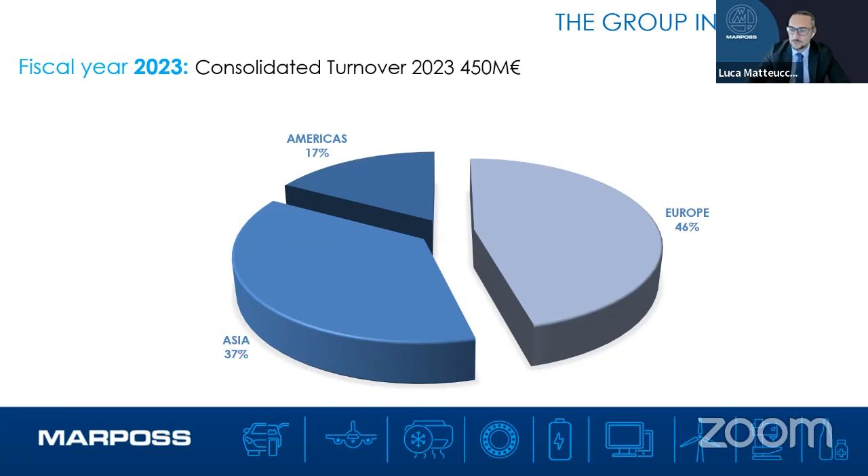2023 has been quite a good year, even if it's still affected by COVID, yes we can say this. The majority, almost 50%, is coming from Europe, and the remaining is coming between Asia and Americas. We have good hope for America due to this new and recent Trump election.

So let's hope to show you different numbers coming from Americas next year. Where we are based: our main sales and service centers are in Germany, China, USA, Japan, and Italy, while our main manufacturing plants are in Italy, China, Germany, US, and France. As some of you may know, we are moving forward to establish a small manufacturing facility also here in India, due to the fact that India is becoming more and more relevant in the international manufacturing landscape. So we really need to move forward with this decision soon.

Which are the markets we are into? Apart from our stronghold coming from machine tool makers and gauge and fixture market, we are pushing forward, and today we have some representatives of this additional market, moving away a bit from the standard automotive industry. We have aerospace, and here in India it's become a very interesting market, as we saw in the last panel discussion. Biomedical, glass industry, where we saw there is quite a good market share in Europe, and we expect the same will become true in India.

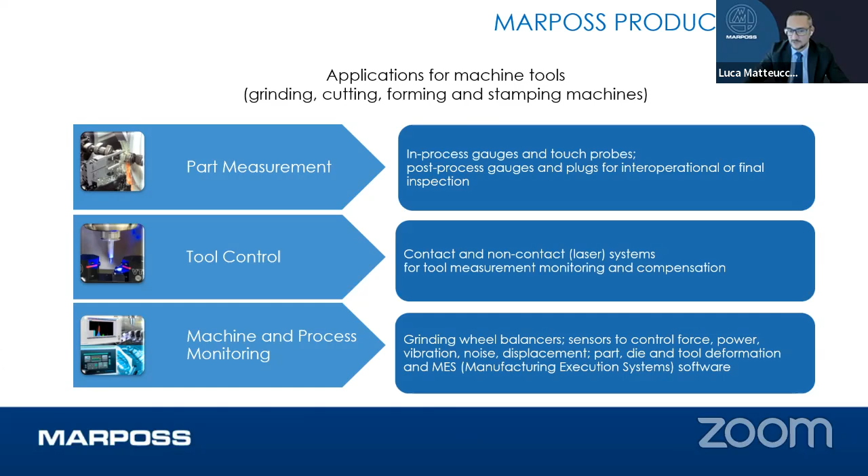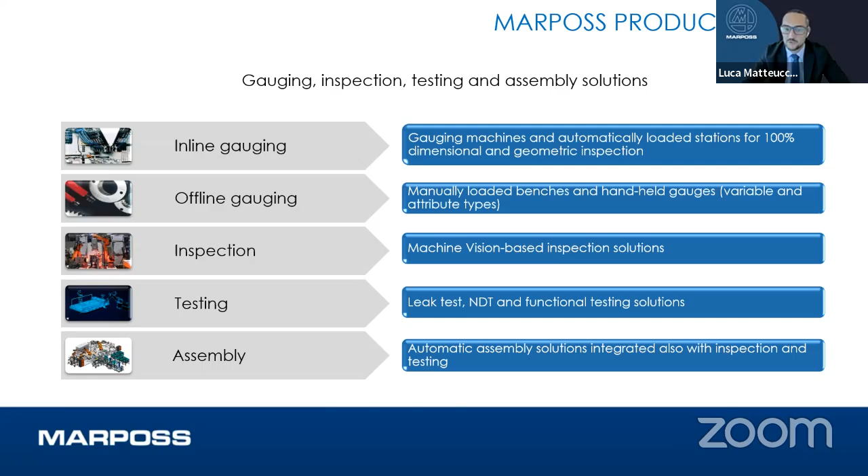Then, obviously, when we analyze the part related to inside the machine, we also offer the post-process, or the after-machining process checks, where we could have inline gauging, offline gauging for sample testing, inspection, testing with non-destructive test, leak test, and functional testing of, for example, batteries and motors. And we also reach the point where we are able to provide completely automatic assembly solutions integrated inside the line of our customer.

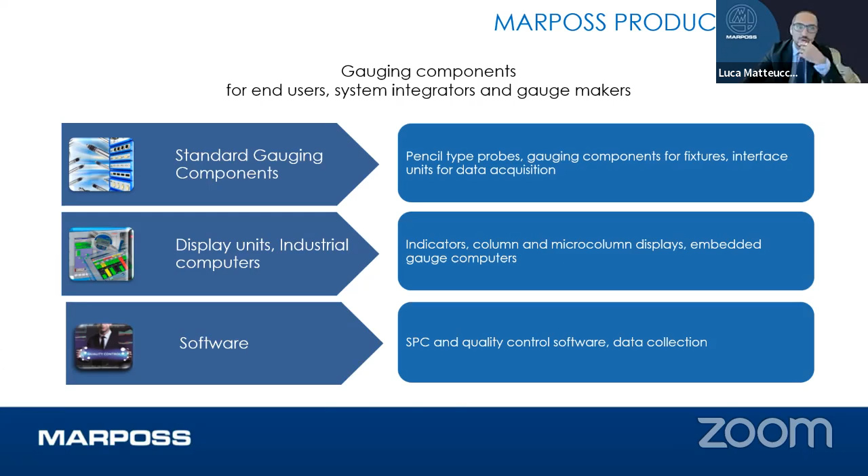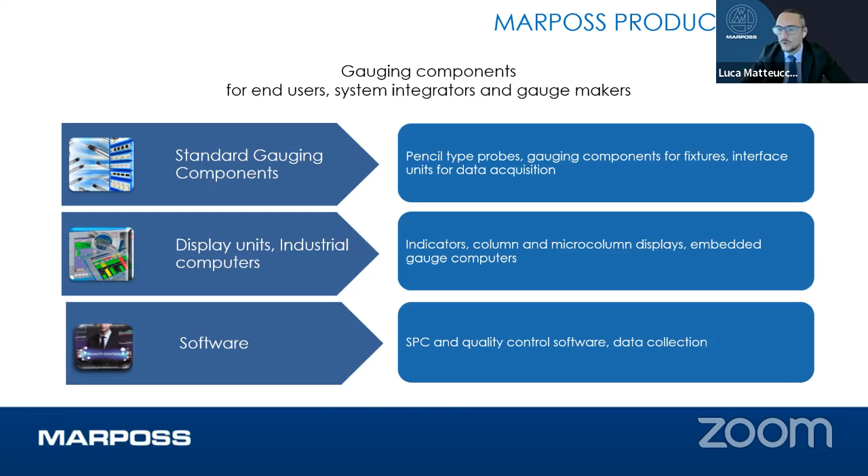How are we able to do this? We are able to do this thanks to our own technology based on our gauging probes, our software, along with our industrial computer, and the software that is collecting all this information to give you the quality indication about how your process is going and what you have to do in order to correct it and maintain the correct level.

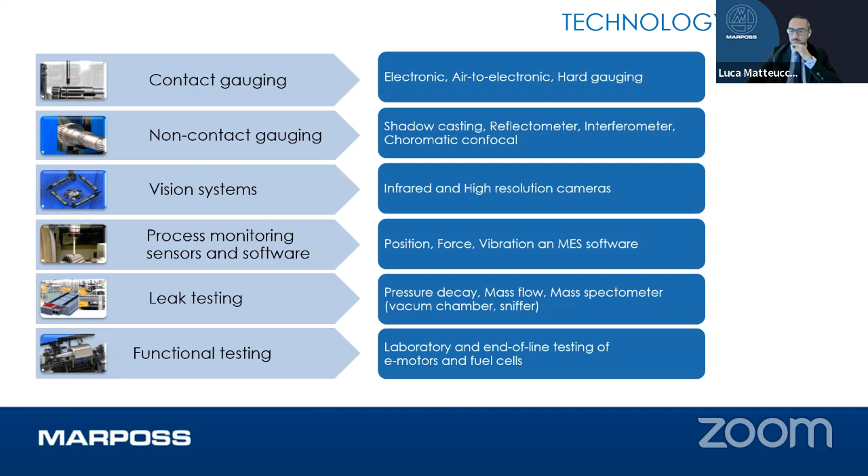So in terms of avoiding overproduction and having an application that's able to measure various parts, we also move forward with this kind of technology. Vision system, if you want to say, is more or less related to the above one, but in a different way. As we said before, process monitoring, sensor and software, again to check the entire environment for the machine, the leak testing and functionality test.

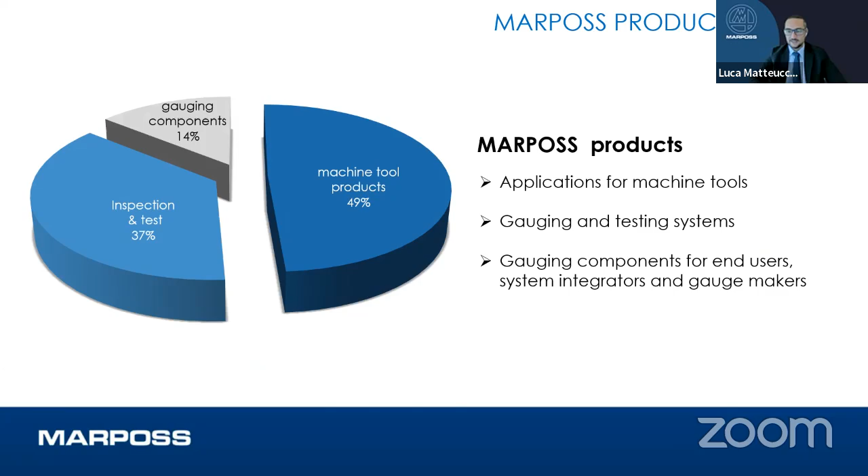Having said that, what at the moment is our range? Our range is coming from, as you can see from this slide, around 50% machine tool products, meaning all the ecosystem related to the machining of the part. Following that, the other big chunk is inspection and testing, around 37%, and the remaining part is the gauging component we just saw in the previous slide.

So we are trying to be as sustainable as possible, especially in this recent time where everybody knows how climate change is affecting our planet.

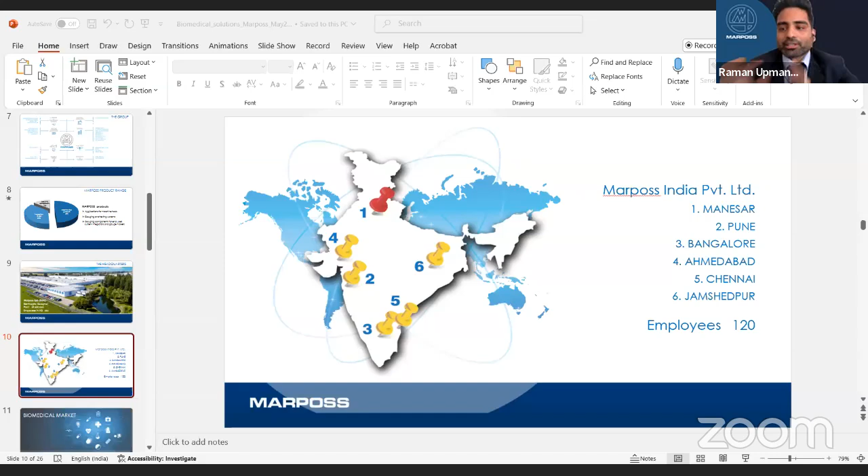So as Luca said, Marposs is a family, and most of the people here have been associated with Marposs for so long. For me, it's currently 3 years with Marposs, and in that time I've felt like I haven't been working in this company for just a short while - that's the family culture Marposs gives. Luca was correctly right about the family culture, and I'll take it a little forward from what Luca has explained to you about Marposs globally.

Just one slide from my side for India also. As Luca explained, we have offices all over India, with the head office in Manesar, and offices in Pune, Bangalore, Ahmedabad, Chennai, Jamshedpur. Total employees is 120. The point is, we've opened offices all over the country because Marposs has a tendency to stay very close to the customers. Manesar covers the north region, and we have a manufacturing facility there in India.

Pune is also a manufacturing hub, along with Bangalore, Ahmedabad, and Chennai. Just to cater to customers of different ranges with the least possible time to provide after-sales service and even sales support, we have opened offices all over the country.

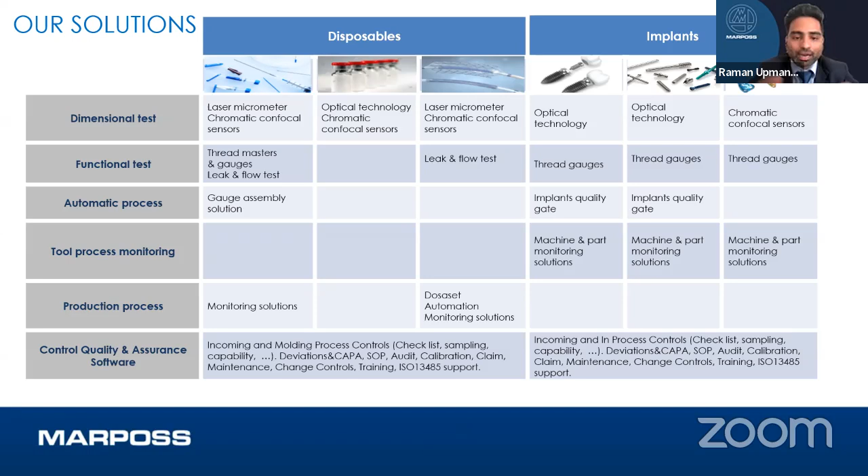For the production process also, we can provide automatic dispensing solutions, which can automatically dispense, say, cyclohexanone to bond something. Apart from that, we also have Industry 4.0 software to link all these.

I'll move on to the implants now. For implants, the first solution we have is the optical solution - the OptoFlash XS. It does complete measurement of orthopedic screws and dental implants.

It can measure threads, pitch diameter, size, profile angle, thread total length, linearity, and concentricity. It recreates the 3D of the complete system, based on the shadow casting process. Then you can have any measurement through our software and cameras, which use the shadow casting process.

Next is the confocal sensors, which are used to detect manufacturing defects. Confocal sensors are based on confocal technology, that is white light technology. Once white light is emitted from our sensor and reflected or refracted back from the surface, with the wavelength calculation we can determine structural and manufacturing defects of the implants.

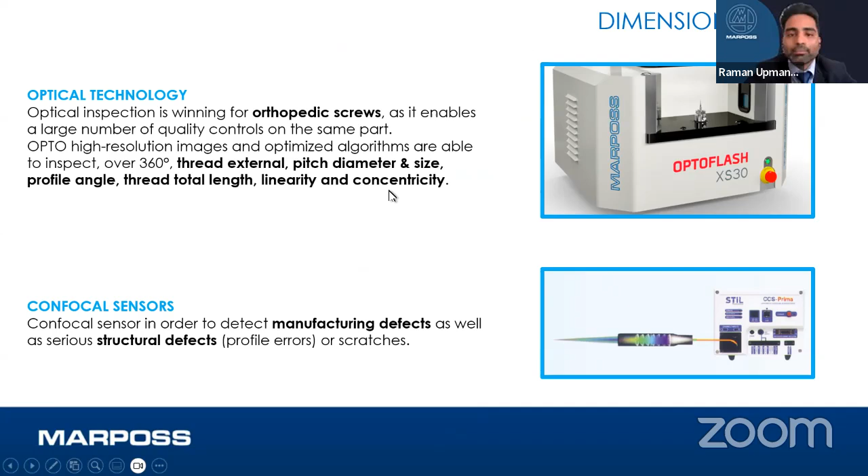Third is functional and inspectional testing of internal and external threads in orthopedic screws - these are gauges we provide to check the mean diameter, angle of the threads, and pitch errors. These gauges are not just normal gauges - people might say they can manufacture gauges themselves.

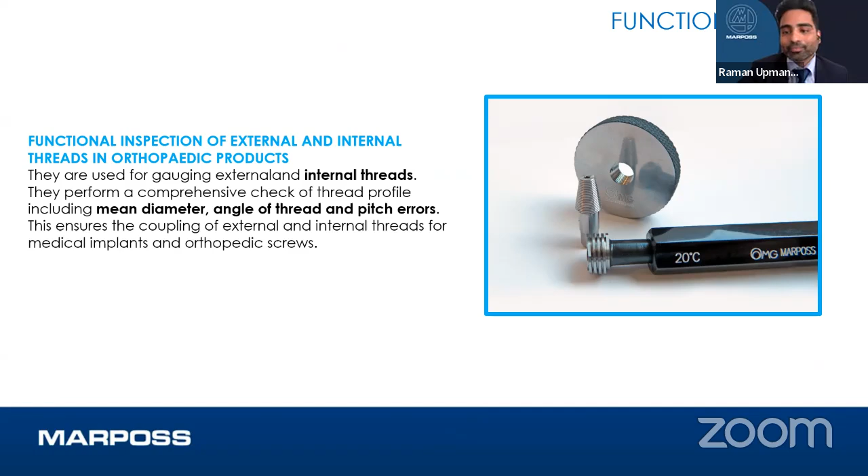Marposs provides gauges with ISO certification, which is a must in the medical segment, because if you're checking a dimension, it will ultimately go inside the human body. So 0.1, 0.2 dimension variance here and there can make a lot of impact. We provide these gauges to check dimensions and provide go/no-go gauges that are ISO certified.

Next, we also provide implant quality gates, as I explained in my previous slides - Marposs can provide dimensional measurement of screws. Apart from that, we can also provide functional testing of screws and nails for implantology.

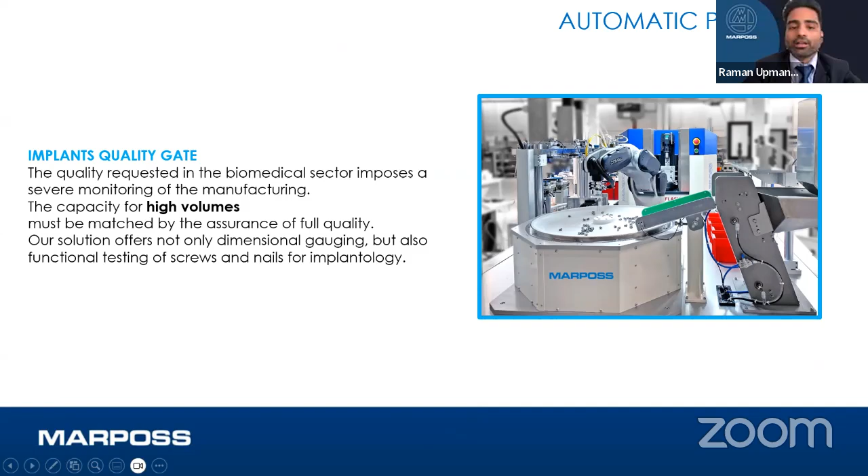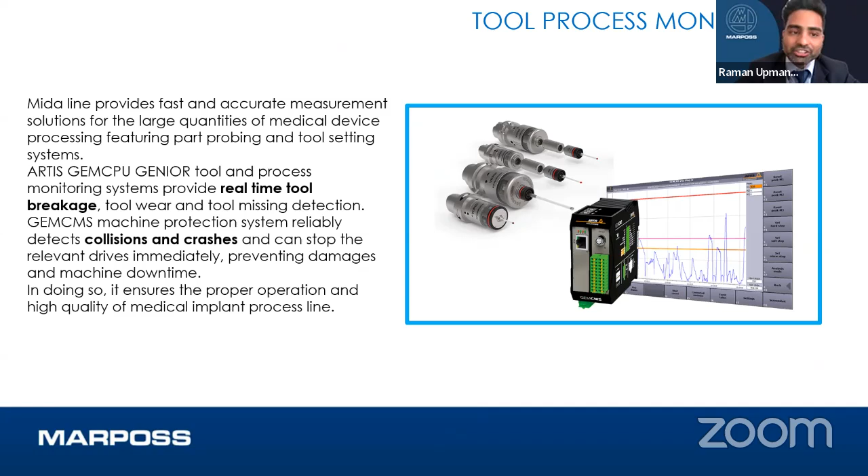This is for tool process monitoring, which I mentioned - whenever we're making screws through machining operations, we can put sensors inside the machine to check the continuous health of the tool, providing real-time tool breakage, tool wear, and tool missing detection.

Next is the latest solution Marposs introduced, the 3D profilometer. These are based on confocal point sensors, but can reconstruct the 3D image of dental implants, and you can check measurements like surface topography through this.

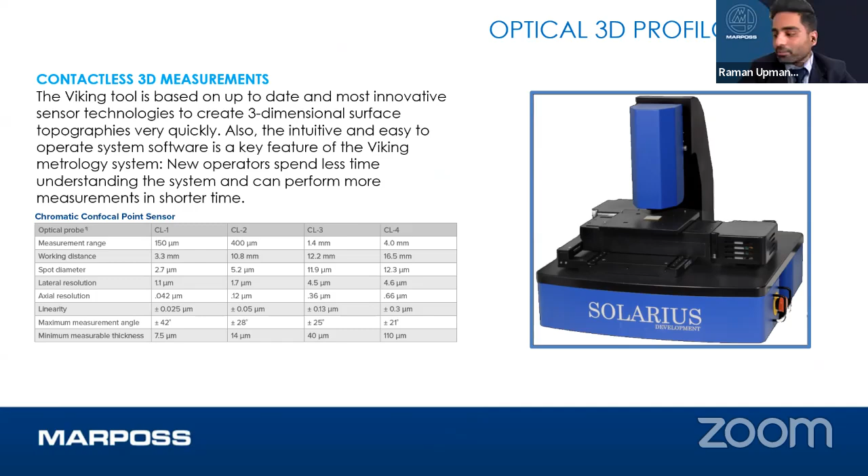Next, I'll move to the disposables. So the first sensor solution for disposables is again the chromatic confocal sensor, which is used to check the thickness of any of the tubes or the glass products.

Next one is the optical technology. As Luca explained, we are into the glass segment also. So for the glass segment, if you want to check vials - in the medical segment, vials are manufactured through glass - if you want the measurement of vials, like the neck diameter, the pitch of the neck, or the length, point to point distances, anything you want to measure dimensionally, we can provide through our optical technology.

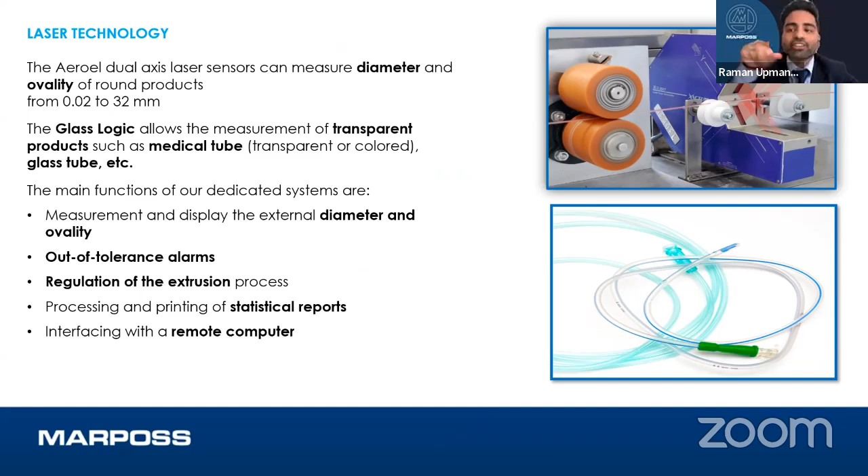Next one, if you might have seen blood tubings - blood tubings are produced by the extrusion process - we can provide you the diameter gauge that is totally contactless, through which you can continuously measure the diameter and ovality of the parts once they are extruded from the machine. Apart from real-time measurement of the diameter, we can provide out of tolerance alarms and regulation for the extrusion process. We can provide feedback to the PLC to correct if the diameter is going out of spec.

The second solution is again the laser-based solution, but that is a portable solution - what we call a handy wire scanner. So if someone wants to check the diameter offline or inline of any medical tube, they can use this laser technology to check.

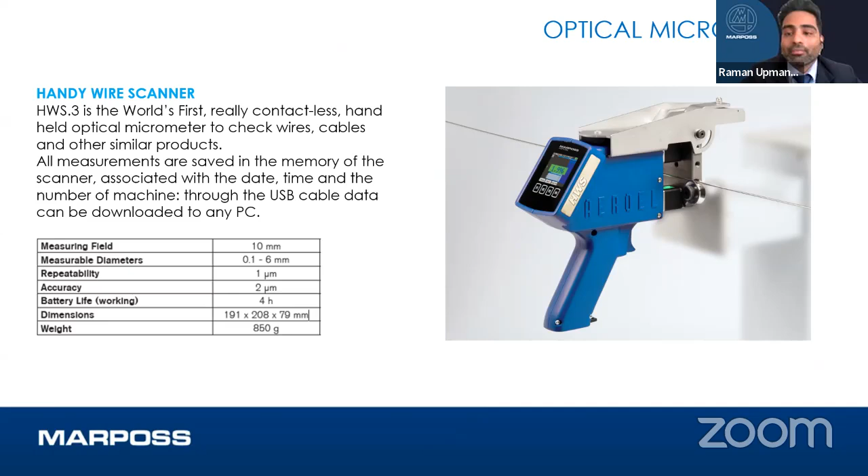I would like to draw the attention of all viewers that, as I told you, Marposs is very well known for precision. We provide repeatability up to 1 micron, which is highly precise for non-contact gauging.

Next, as I explained for the implants also, we can provide ISO certified gauges to check the thread connectors, as per ISO standards - ISO 80369 and ISO 13485. These are all already ISO certified gauges.

The final solution I would like to introduce is leak testing. In the medical segment, leak test is very important. Suppose you are manufacturing blood tubes, blood bags, urine bags, anything - if you do not do the leak testing, you cannot pass your product and send it to the market.

Marposs can provide you the complete leakage testing solution, for air leakage testing. Apart from the leakage, we can also provide flow test with a single system only - so you can have flow testing to measure flow and leakage in one go.

Next one is the solvent dispenser. When blood tubes are manufactured and then joined to a connector - that is a plastic connector - the fluid used to join that connector is called cyclohexanone. So this is the production equipment we can supply to have the automatic bonding of the tubes to the plastic connectors.

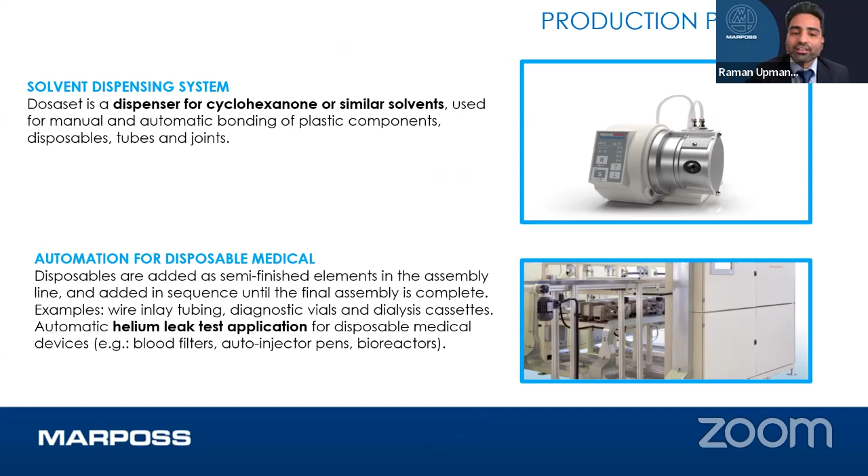Apart from that, if someone wants very precise leakage detection which cannot be detected through air - because air has the limitation to detect leakage up to 10 to the power minus 3 millibar liter per second - we can also provide the helium leak test application, which can be used in blood filters, auto injector pens, and bioreactors.

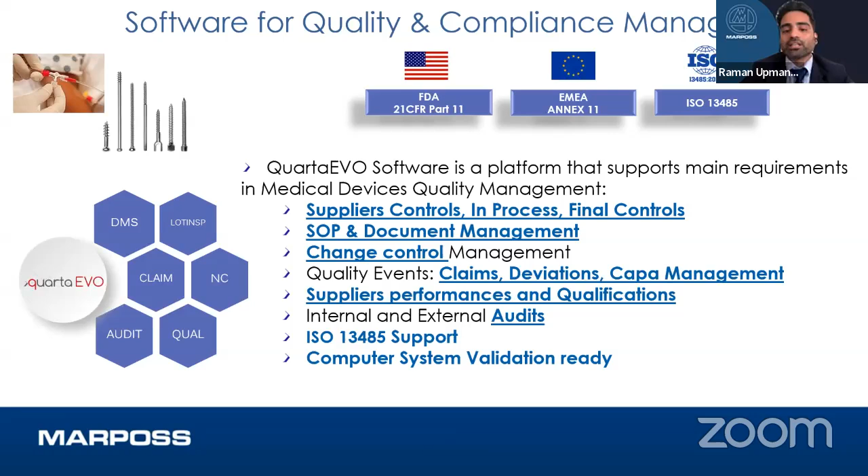Apart from that, as I explained, we can provide software for quality and compliance management - Industry 4.0 software, which can be supported by ISO standards like 13485. So that will be all from my side.

Thank you so much. Thank you, Raman, for taking us through your slides. And I feel healthcare, medical systems, biomedical is very important. And like you said, one life lost is far too many. I guess manufacturers of the biomedical industry would look at all those products, and if anybody wants to improve quality, leak testing and other stuff, they must look at this product. Thanks, Raman. And now let's move to Hanish.

Thank you, Dineshji. Thank you, Luca, for this opportunity. I will speak about our offerings in the semiconductor industry. As an introduction, I started in Marposs in 2004, coming from college as a service engineer, and then I moved to sales. Then I served as regional head for North, moving to strategic business, and now I am currently key accounts manager head as well as industry manager for semiconductor and 3C. So I'll focus on the semiconductor offerings today.

So, what does Marposs offer? Marposs provides sensors for process control during and after the machining process. I'll just skip through this slide - Luca has already covered it - so what we do, the sectors we are into, the numbers for the group.

So, machines for chip manufacturing. Here we are trying to show the key machining process and the equipment in chip manufacturing, starting from ingot grinding to packaging and die attach.

What does Marposs do? Marposs sensors can be integrated inside an automatic machine to keep under control some parameters that are essential to keep the production quality under control and reach a constant productivity. So the keywords here are production quality and constant productivity. I will speak about our solutions, which are offered inside the machine for three processes.

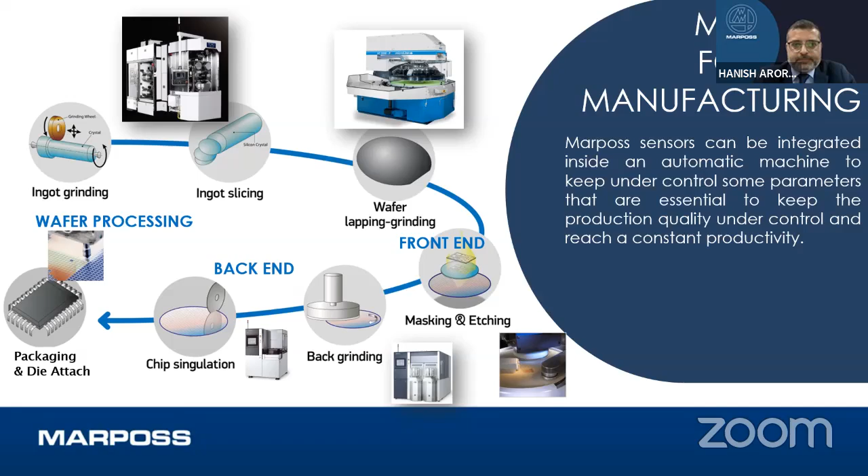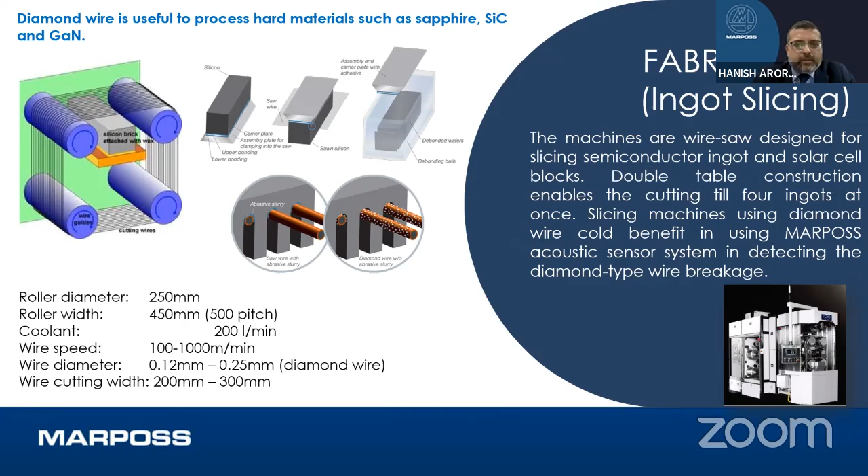For solar, there are square ingots. For semiconductor, there are round ingots. The slicing machine using diamond wire could benefit from an acoustic sensor system in detecting wire breakage. The wire is around 200 micron in diameter. The diamond may chip off and the wire may break, so we are basically offering an acoustic sensor with a P1D AE amplifier, which is able to detect the wire breakage.

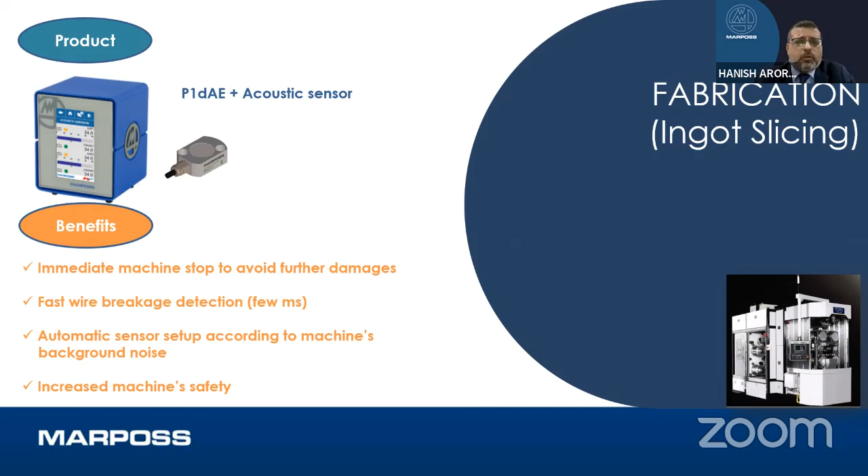So we have a P1dAE plus acoustic sensor. The benefits are immediate machine stop to avoid further damages, fast wire breakage detection in just a few milliseconds, automatic sensor setup according to machine background noise, and increased machine safety. So this solution goes on the ingot to detect the wire breakage.

Coming to back grinding, achieving the correct wafer thickness before assembly is critical in semiconductor manufacturing. Wafer back grinding is a semiconductor manufacturing process designed to control wafer thickness, which is essential to produce ultra-thin wafers used to create stacked and high-density packaging. As we understand, the wafer has to be thin because the chips are already there, so an 800 micron wafer has to be thinned down to 100 or 150 micron, depending on the application.

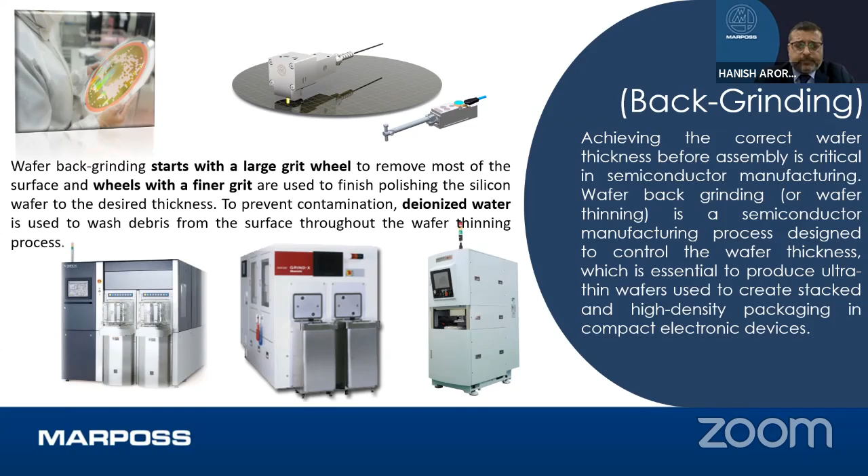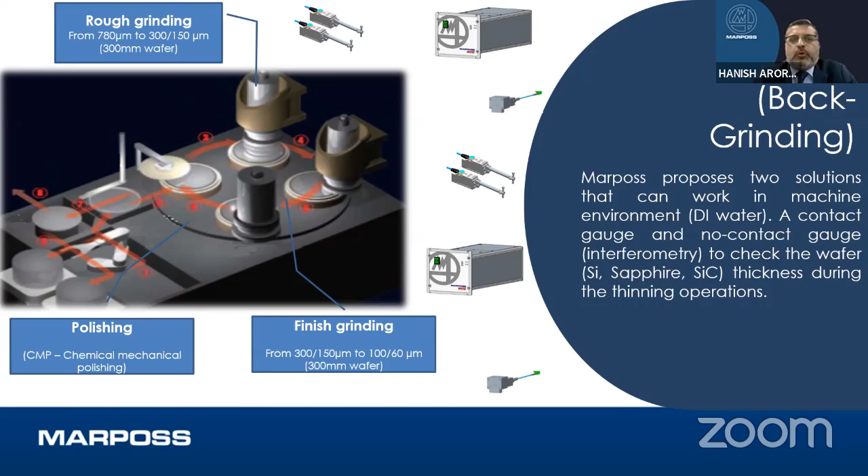There is a huge grinding wheel, and DI water or ultra pure water is used as a coolant. What is our offering? Marposs proposes two solutions that can work in the machine environment. We can offer a contact gauge or a non-contact gauge, depending on the application and depending on the material during the grinding process, basically checking the thickness during the grinding process.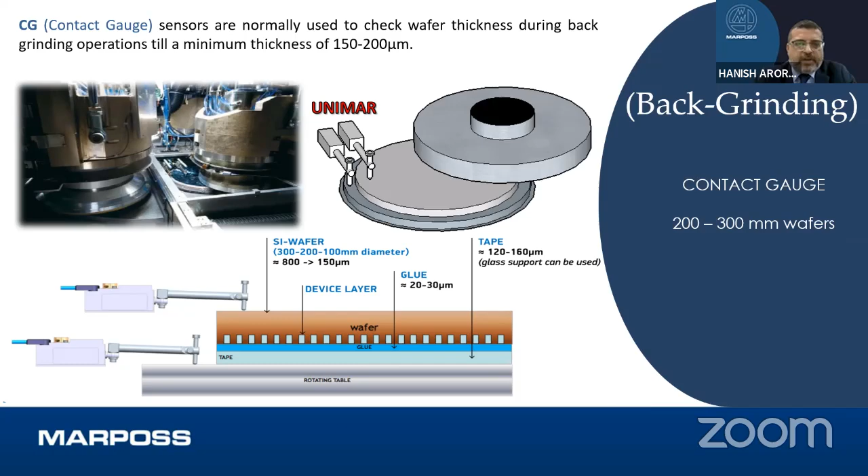The first offering is a contact gauge, normally used to check wafer thickness during back grinding operation down to a minimum thickness of 150 to 200 micron. In case of silicon material, we can use a contact gauge. But there are wafers that cannot be measured with contact or infrared, such as hard materials like highly doped wafers, gallium nitride, silicon carbide in some cases, and gallium arsenide. So we have a different solution for that.

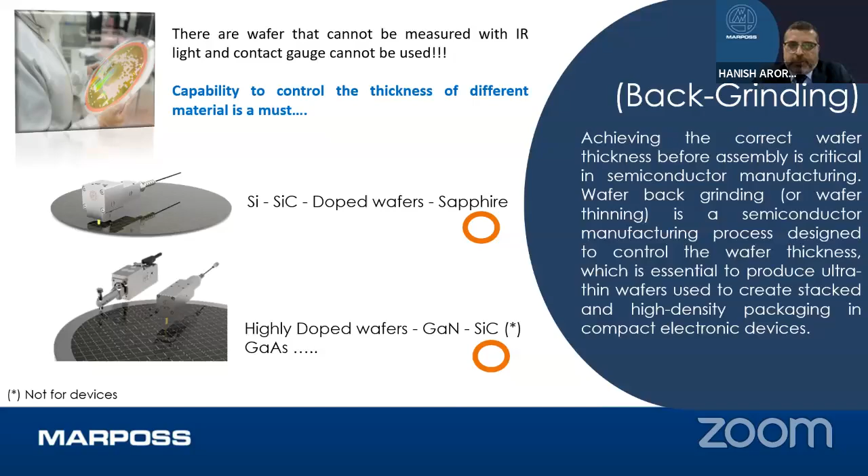We are offering a flexible configuration using multiple types of sensors, with the capability to control the grinding of different types of wafers and produce a stable measure. As we understand, wafer chip manufacturing is a complex process using different types of materials, so we have designed different sensors and amplifiers looking at the industry requirement.

In case of silicon, we have a contact gauge. In case of silicon carbide, which is transparent to infrared, there is interferometry using an IR gauge. Then we have confocal, where we can use it with a distance gauge. Then there is a contact gauge where we use the IR gauge, and different Marposs sensors for the machine monitoring.

Here I would like to emphasize that the Marposs controller acts as a black box. There is a log file which basically checks what parameter has changed if there is any issue, whether on the machine side or the measurement side. So we have a log file which is able to trace where the problem stands.

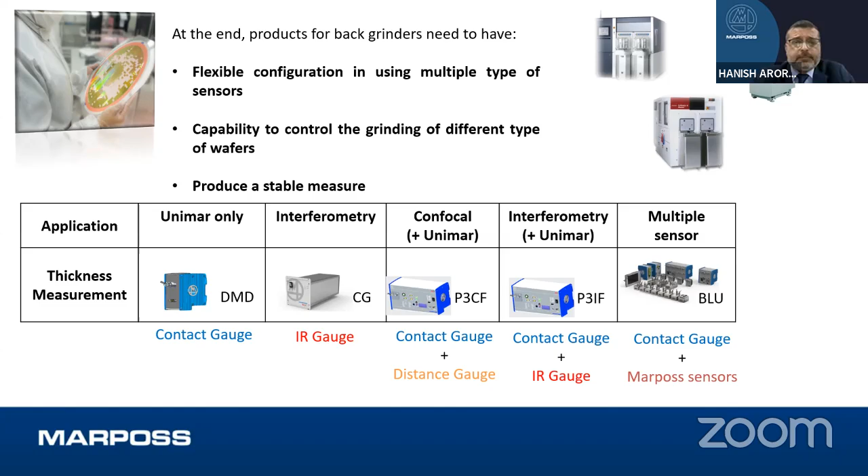Coming to the NCG. A silicon wafer can be thin for less than 150 to 200 micron, where we can use a contact gauge. But where we need a thickness of less than 100 micron, we use an NCG, a non-contact gauge that works on infrared. In case of silicon and silicon carbide, where the material is transparent to infrared, we can use an NCG and control the wafer grinding process, measuring thickness down to around 4 microns.

It comes in different configurations, depending on the material and application. It's a reliable solution in dry and wet environments. The measure is not influenced by any tape, support, or glue presence. Mounted on an arm, it can be used to check wafer's TTV. We can check thickness coming down from 900 micron to 4 micron. Smart elaboration and digital output is

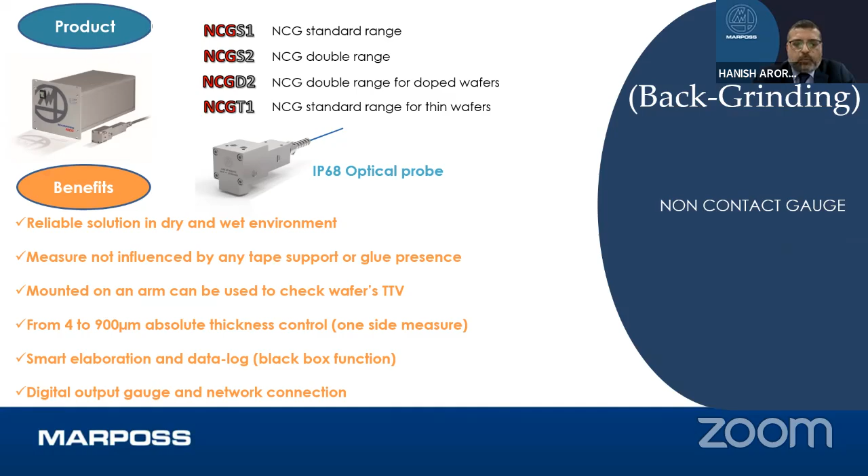there. Very recently, we have developed a new gauge that we call P3CF. This has been developed for hard materials, where we have highly doped wafers, ceramic plates, and germanium, which are not transparent to infrared.

So in that case, we are using confocal technology. There is one contact gauge on the rotating table, and the other confocal gauge is on the wafer, so not destroying the wafer while also measuring the wafer thickness. This is mainly used for hard materials.

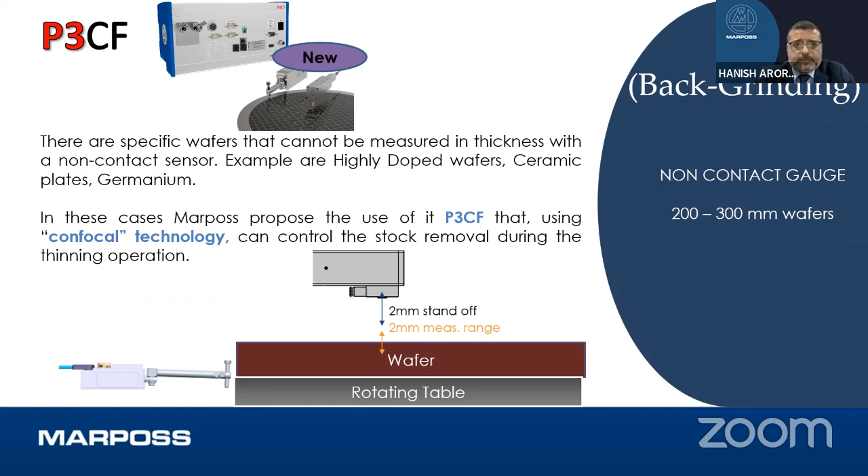Coming to the next process, that is dicing. Initially there was an ingot, then a wafer. The wafer already had chips on it. We had to grind it from 800 micron to 150 micron, depending on the application, where we were doing back grinding. Now there is dicing. Chips are on a thin wafer after back grinding, and now we have to cut the chips, which will later be packaged. A dicing saw is used to basically cut the chips from the wafers, and semiconductor wafers can be of different materials, such as glass, ceramic, crystal, and others.

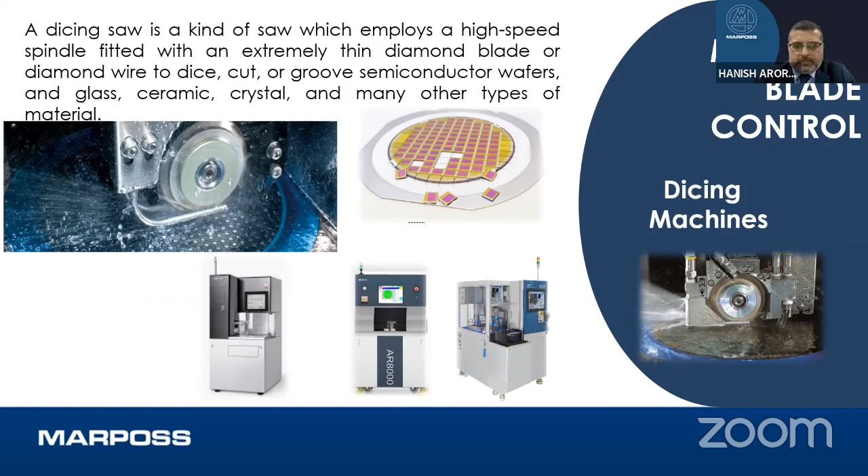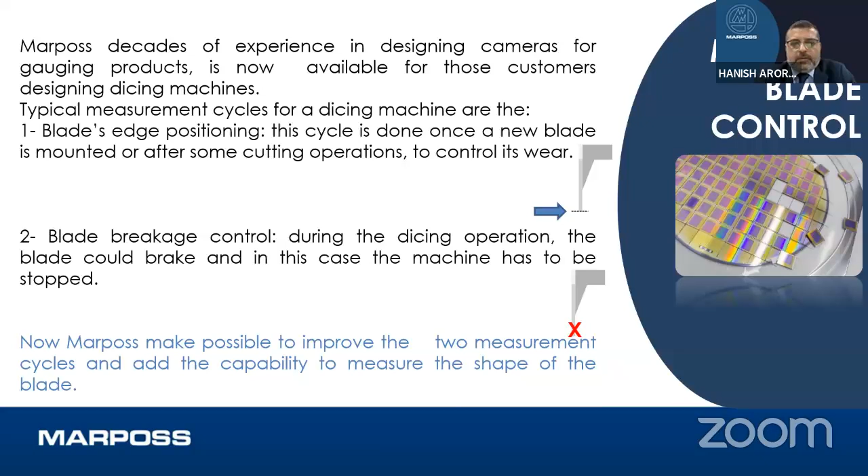Marposs has experience in camera technology and solutions on the machine. We have developed a laser diode which checks the blade's edge positioning. This cycle is done to control the blade's wear. We have another sensor doing the blade breakage control. We use the MDG1 controller, where there are two sensors: one for positioning to control blade wear, and the other for blade breakage.

Actually, the blade is quite fragile, around 30 micron in thickness. So we need some sort of mechanism to understand if there is wear or breakage.

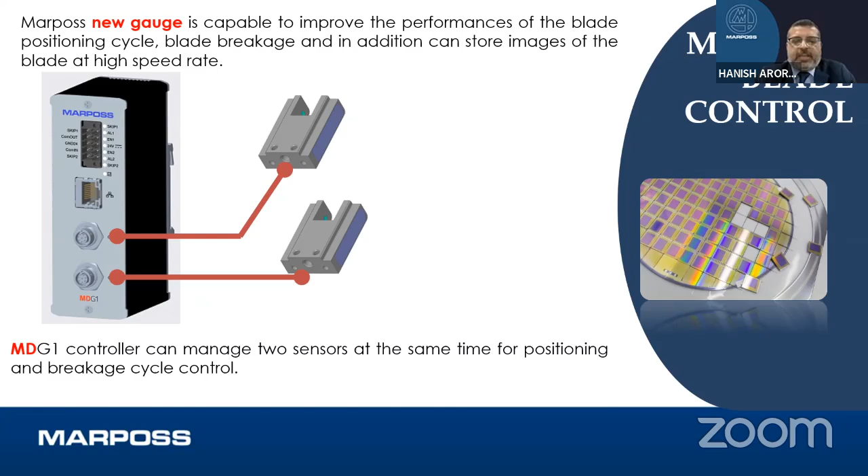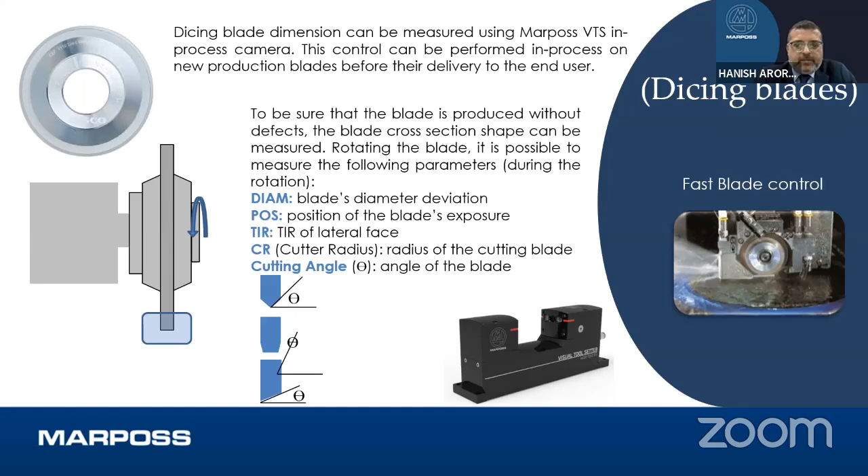Additionally, we have a camera-based system. Dicing blade dimension can be measured using the Marposs VTS in-process camera. There is a visual tool setter that can check the dimensions of the blade. We can check the blade's diameter, its position, the TIR, the cutter radius, and cutting angle. We take a picture of the blade with a camera and are able to measure these parameters.

So this is how it looks like. And if required, we have to change the blade.

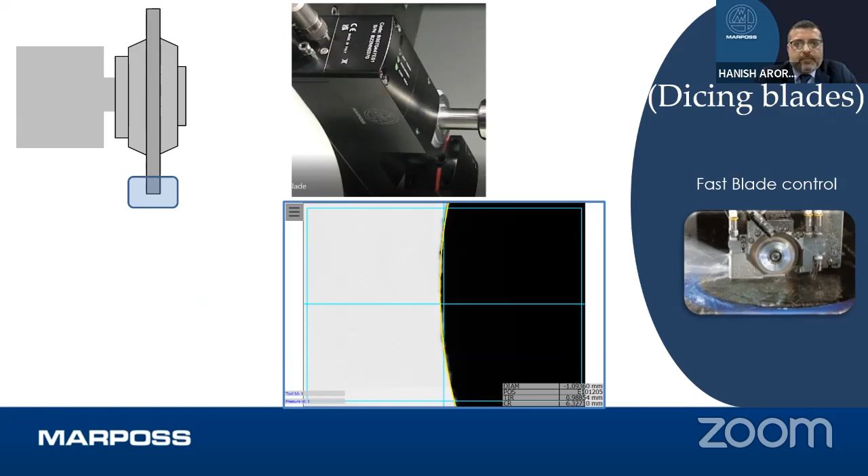I spoke about our sensors used during the machining process. Now comes the second part, the sensors used after the machining process, mainly for metrology and inspection. Marposs can offer a wide range of sensors: it could be a single point contact confocal sensor, a line sensor, a camera, white light interferometry, or an infrared sensor.

Semiconductor manufacturing is a complex process, and we may need metrology at various levels of the process. We offer different sensors for inspection, thickness, TTV, bow, warp, and 3D topography. Point sensors work on IR and white light and are able to detect the thickness of transparent and non-transparent materials, ranging from silicon to gallium arsenide, gallium nitride, sapphire, etc.

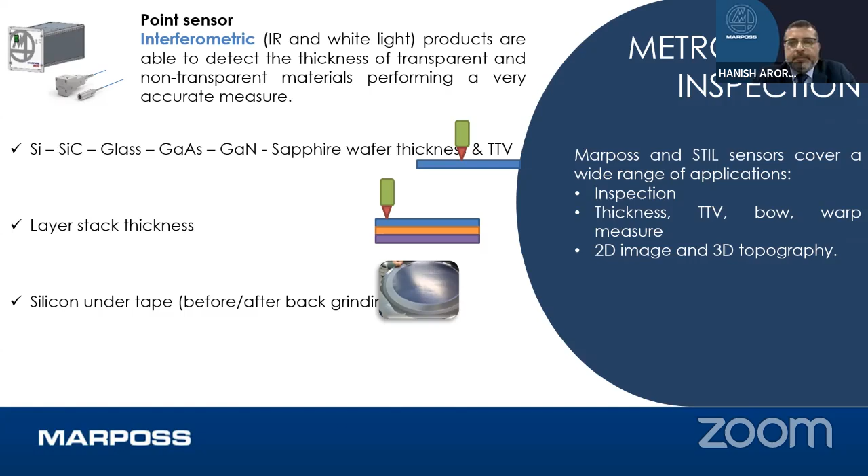Confocal technology is the optimized solution to produce different types of high accuracy measurements. We are able to check the following parameters: transparent layer thickness, TTV (total thickness variation), critical dimension, TSV, micro topography, flatness, roughness, waviness, step height, stress, wafer thickness, and TTV. So all sorts of required measurements, we are able to do.

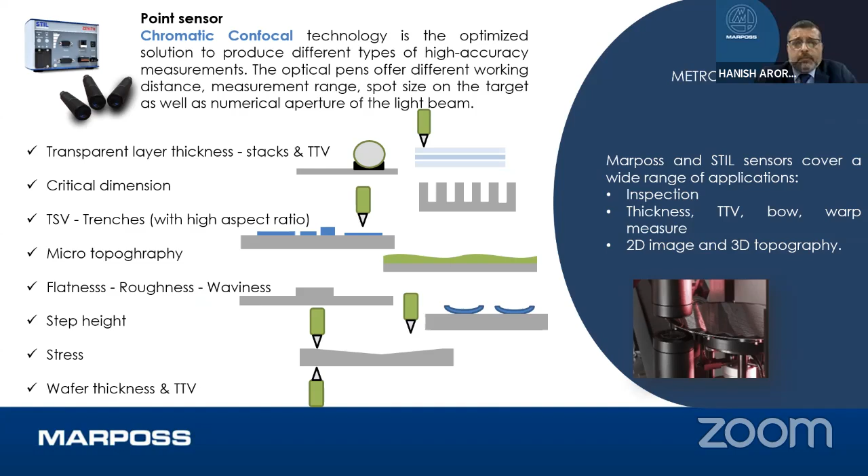Additionally, in the semiconductor industry, ball grid arrays are indispensable for first or second level interconnect, where two chips are connected through interconnects. The arrays are tested for planarity and diameter uniformity, and we use a point sensor offered by our group company from France.

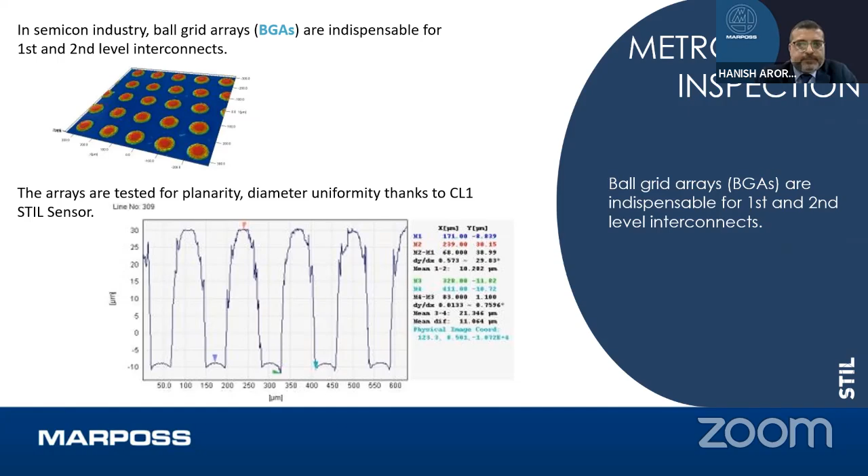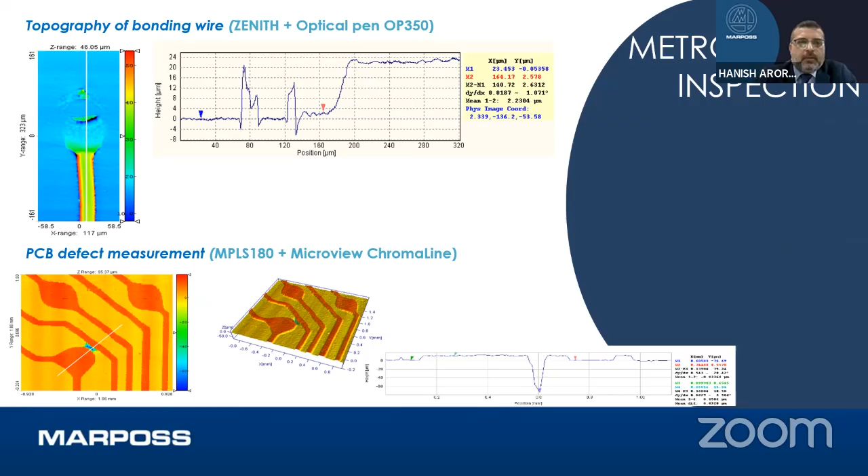Besides, we can do topography and PCB defect measurement. On the defect side, we can take a picture of the sample and perform different types of measurements, such as checking for scratches, dents, or other cosmetic requirements.

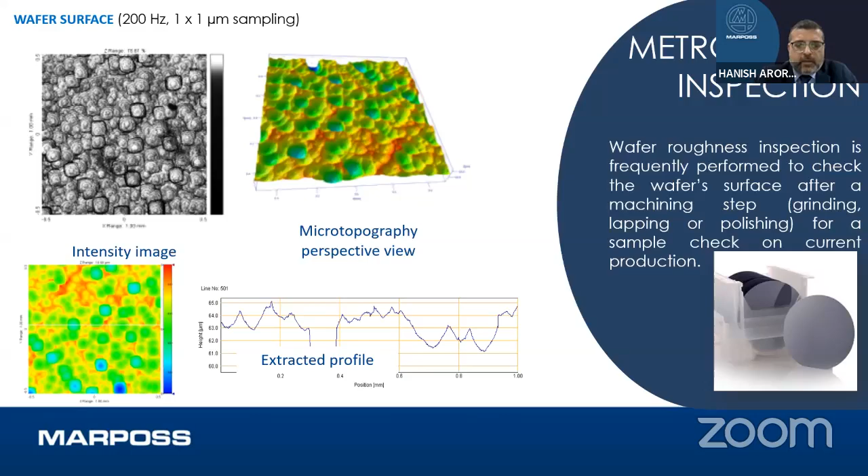These are the wafers. Wafer roughness inspection is frequently performed to check the wafer surface after the machining step. Wherever roughness, flatness, or waviness measurements are required, we are able to measure that. We can take a snapshot of the profile and check the wafer roughness in microns.

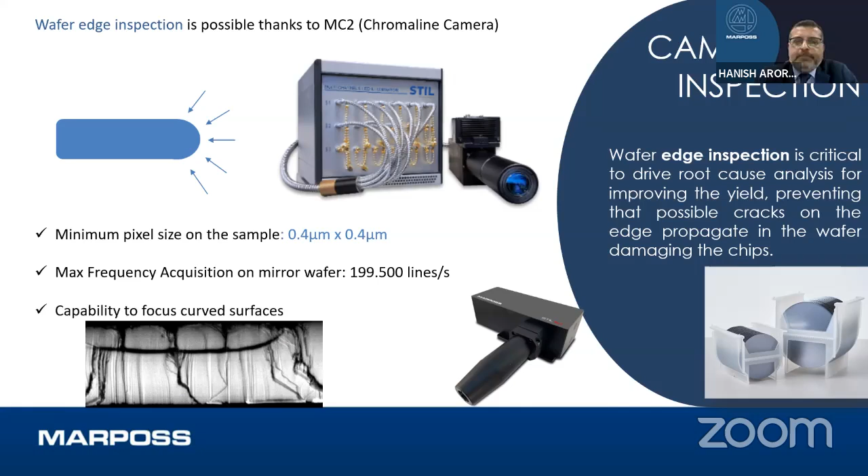We are also doing wafer edge inspection. This is critical to drive root cause analysis for improving yield and preventing possible cracks on the edge from propagating into the wafer and damaging the chip. If there is a crack on the wafer edge, it can damage the complete wafer, so we have a camera-based sensor that can be used to check the wafer edge.

PCB can be inspected with the camera itself.

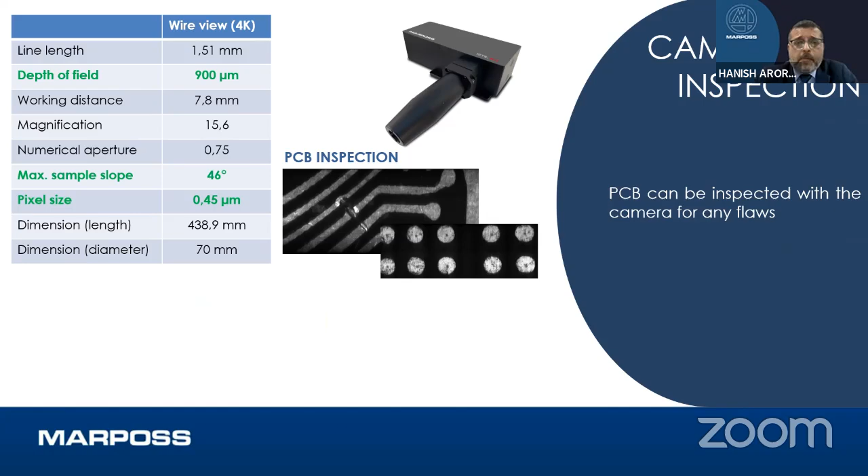Very recently, Marposs made another acquisition, Solarius, a company from the US that offers 3D non-contact profilers capable of 2D and 3D geometry and dimensional measurement like angle, radius, step height, and distance. We can do defect analysis at micro and macro level, as well as reference measurement.

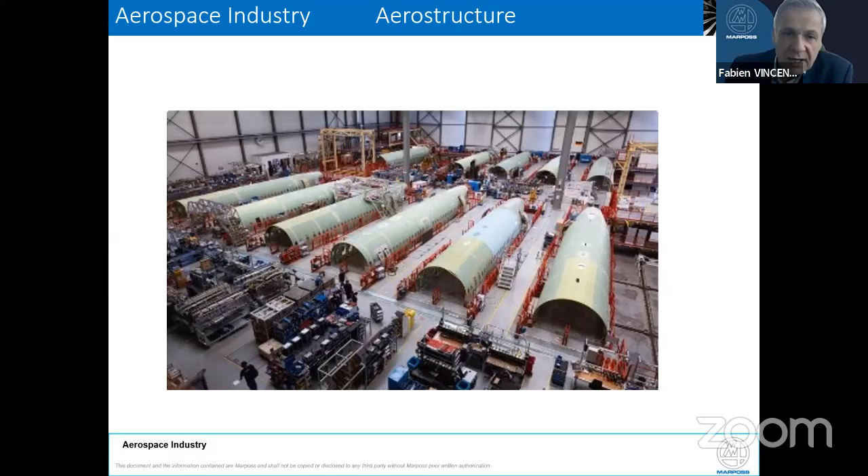So what we're doing in aerospace activity is both things. We're working directly with tier one companies and OEMs, and we're also supplying the supply chain with equipment from Marposs, similar to what you've seen so far, but also with specific tooling and equipment designed and used only for the aerospace business. We work on large parts and aerostructures, which require various technologies we'll see later on, either for the assembly of the aerostructures or for their components.

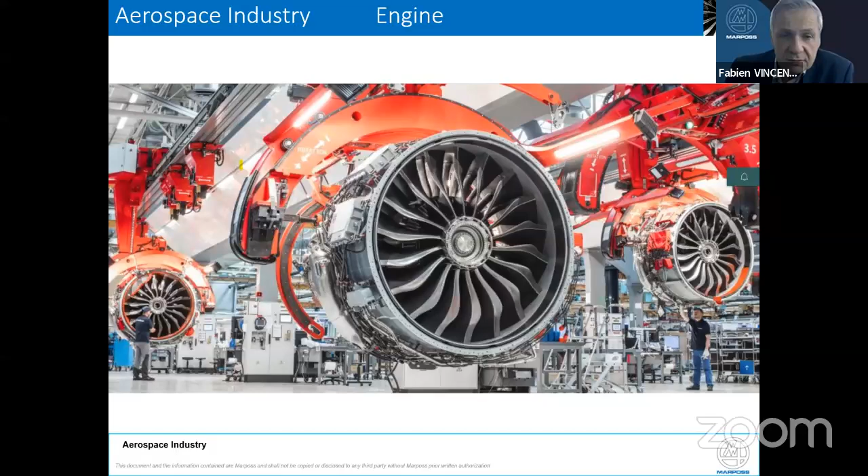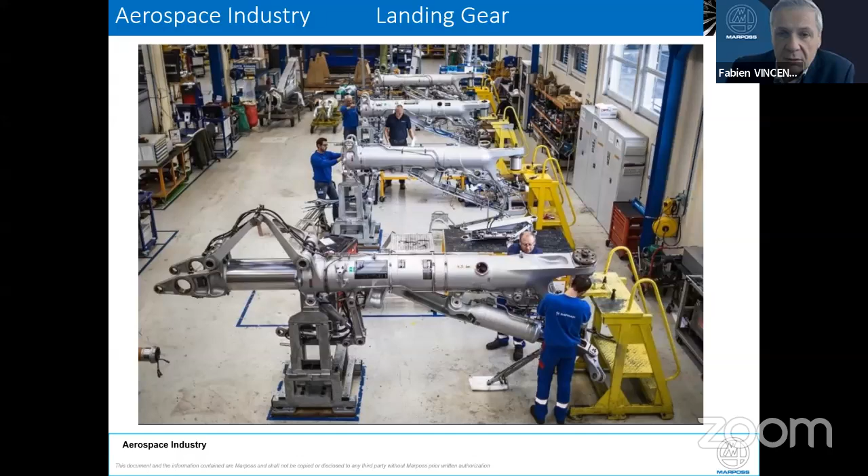We are very close to engine manufacturers. These are OEMs, large makers, of course only four of them really large. We also work with customers manufacturing landing gears, which are complex, sturdy machine systems where we offer our technologies across various topics, and of course all related equipment for gearboxes and transmissions.

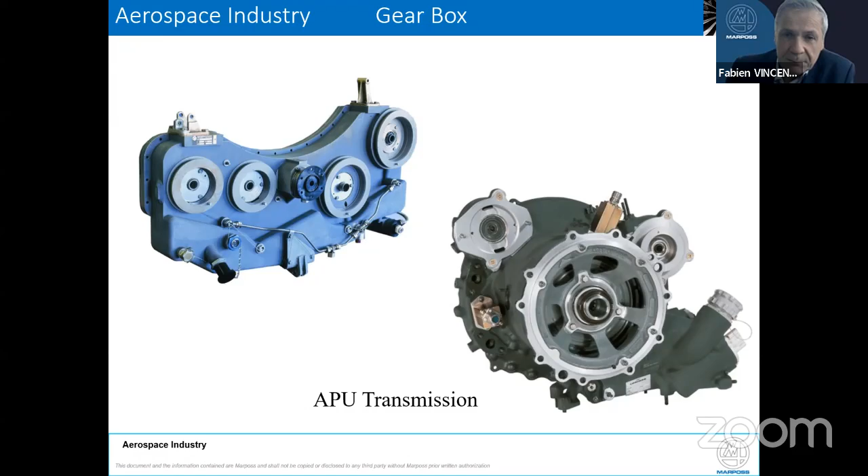Here we have big mechanics as well as fine assemblies where our customers use our equipment. And lately, with the move toward electrification of airplanes, we see more and more actuators and motors inside the planes. Here we're using our systems for controlling motors and eventually also checking batteries, which are part of the complete assemblies of aircraft. These are elements of safety as well as elements of vital need.

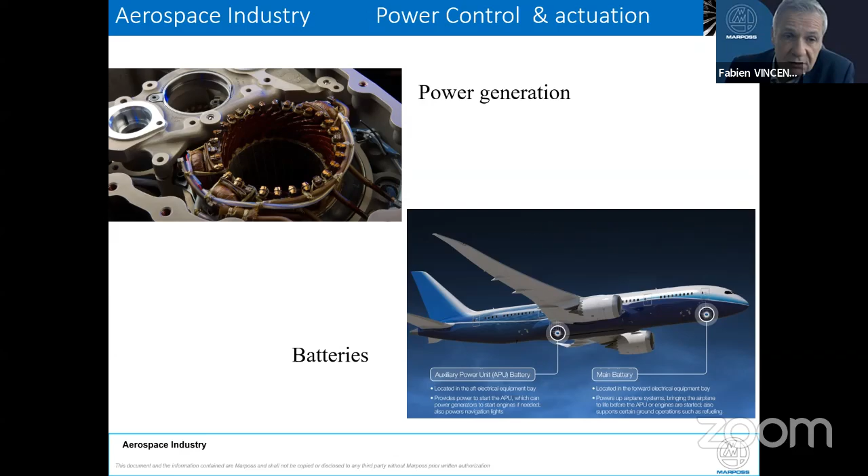So what we do here, we have a rough view of all the technologies that we're able to use for dimensional inspection.

We can see that some of those components used in aerostructure will require our equipment for dimensional inspection, for process and tooling monitoring. And we have mapped all of the necessary components in the aerostructures that will require in a more detailed way technology, which has been partially already presented here.

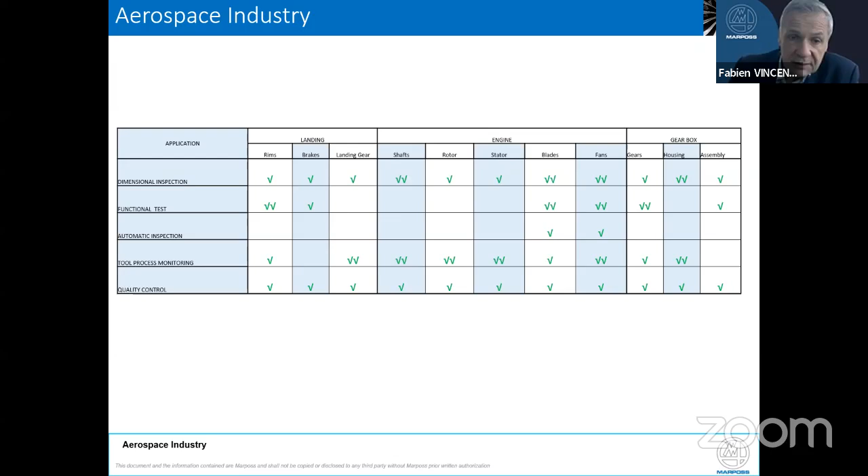So we have done this mapping. You can see even for batteries and e-motors, there are lots of functional tests currently made with our systems to check the motors in the airplane. Likewise, when we speak about landing gears, we see related items like rims and brakes. There are lots of elements in process monitoring as well as functional tests where we supply our technology.

As far as the engine is concerned, we have intensive manufacturing processes where many components are vital to the engine, rotating components. An engine is a very complex system which requires checking in detail all of the elements, including functional tests as well as dimensional testing and controlling. And of course, we are using along these processes all the process monitoring which has already been introduced to you.

Now we will enter into this. If you look at my table here, you can see that quality control is something which we have to do virtually always. And if you look at dimensional inspection, there is no other way to produce components for the aerospace industry. I have to do dimensional inspection.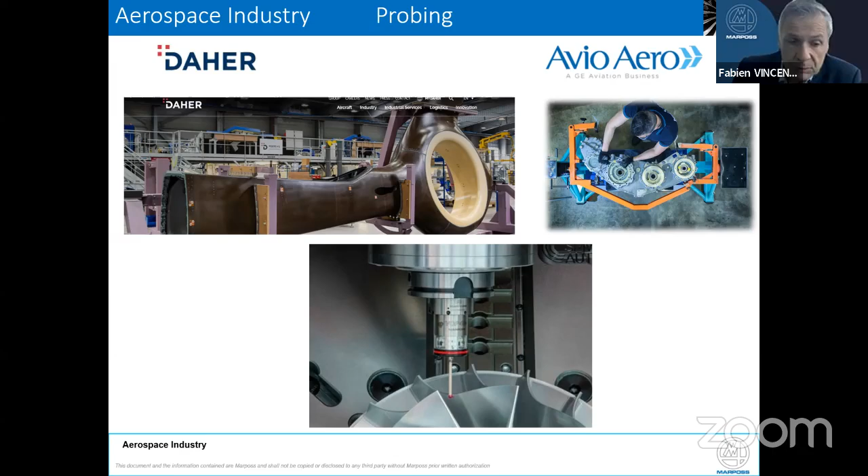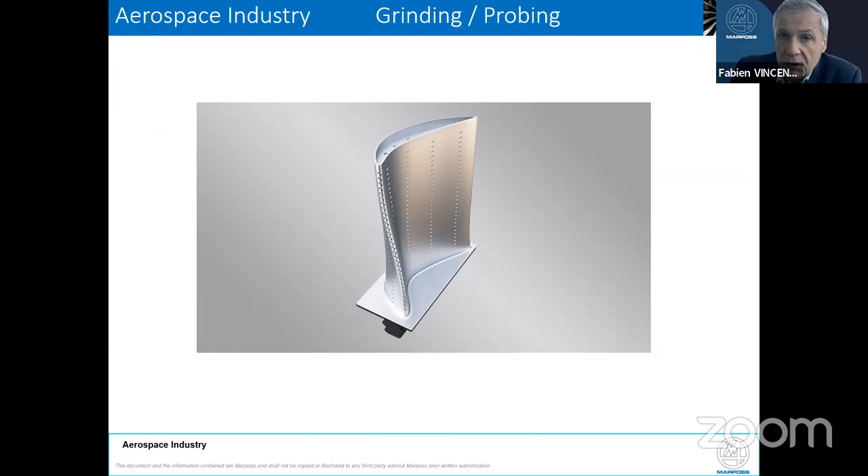Components like turbine blades or the compressor blades require as well probing, grinding, and monitoring devices to make sure that the grinding process is done properly. This is the shop, located at one of our customer OEM's manufacturing landing gear.

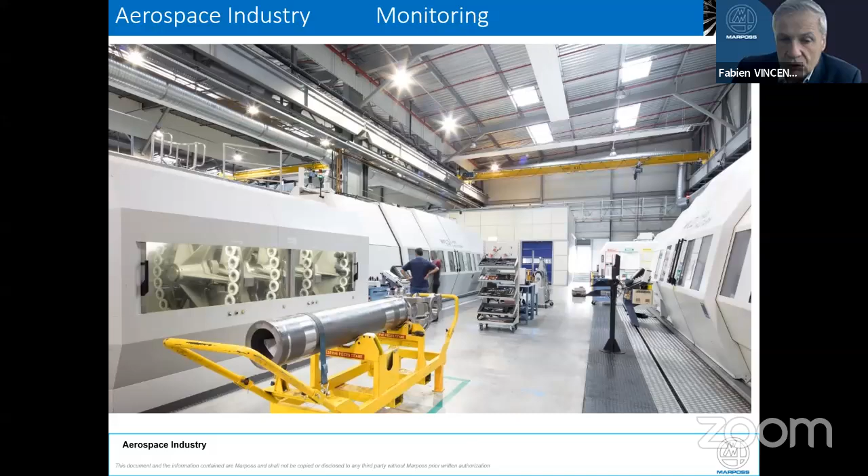You can see the landing gear here on the yellow cart, which is brought into the machine. These machines run 24 hours, 7 days a week. They are fully door-closed machining processes. That means there is no one opening the door to see what's going to happen. That requires, of course, a monitoring device.

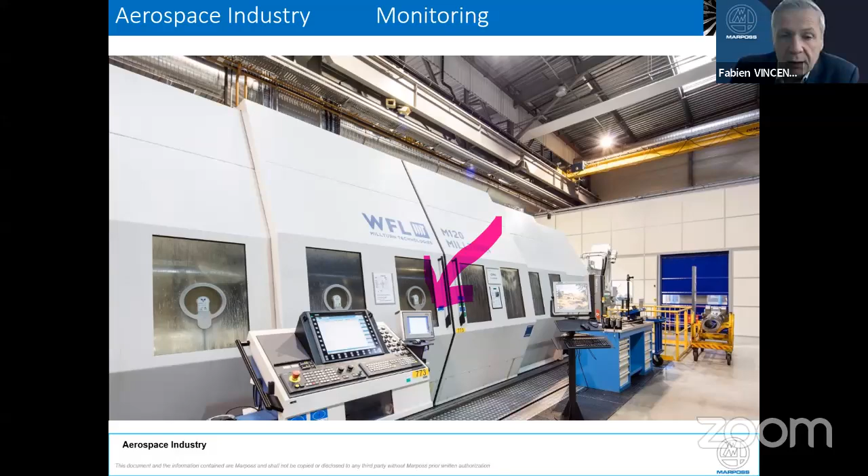And you can see here one of our monitoring systems from Artis, which drives and makes sure that all the processes are made in compliance with what is requested. Just one piece of information about this: monitoring requires sensors, all sorts of sensors which are located in the machine. Okay, this is another kind of machine.

As you can see here, the sensors are either torque or force sensors. We have power monitoring, coolant flow, acceleration, vibration, acoustic, and force gauges. All of these sensors send data to our system, which makes sure that every single process is done within the normal range it should work in. That's the way monitoring works, and that's the way you can keep on with closed-door machining using our system.

Here as well, Rolls-Royce has selected our system for machining of blisks for engines, and they use Marposs systems in their machines.

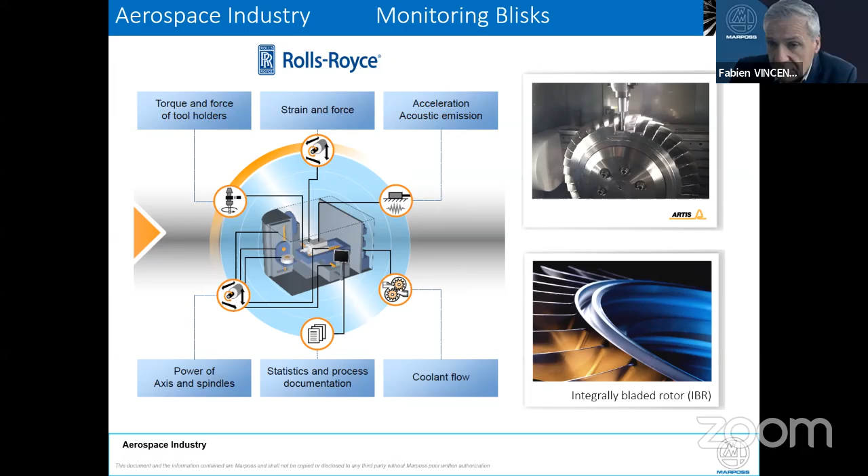Another important and very big volume of components in aerospace, coming back to aerostructure, are rivets and fasteners. They must be made and are used massively, and must be manufactured according to specifications. When you have mass production of rivets, the only way you can make sure those fasteners are made properly is to use monitoring devices on the machines.

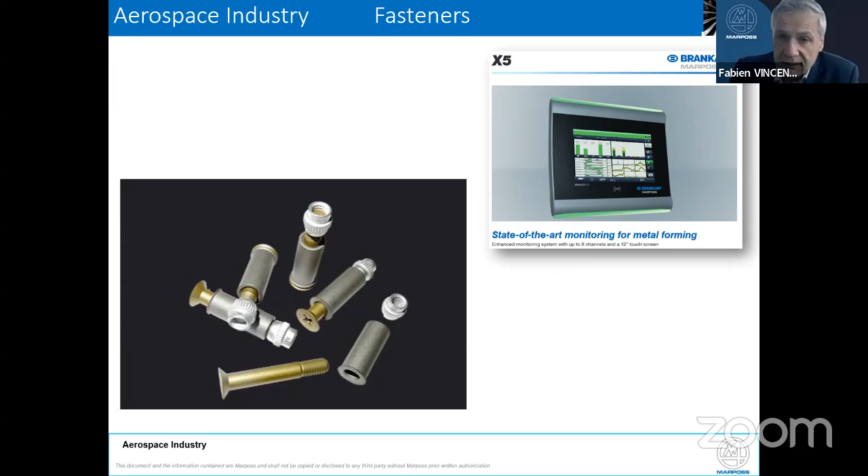And here we offer systems from Brankamp. That's an example. Some of our customers use these to manufacture their fasteners for the aerospace industry and to guarantee compliance in the production of their products.

Likewise, aerostructures - I spoke earlier about rivets and fasteners. They drill holes in the aerostructures to fix the elements together. Drilling holes is a delicate process, especially when you have bonded materials or multi-layered materials.

And you must make sure that the hole, I would say the angle of the hole, is correctly made. To do this, you need to check those countersinks, those chamfers, the depth of the hole, the diameters, because if the rivet is not properly fitted, it will generate, in the best case, some turbulence. In the worst case, it can crack the structure and put the whole aerostructure in danger.

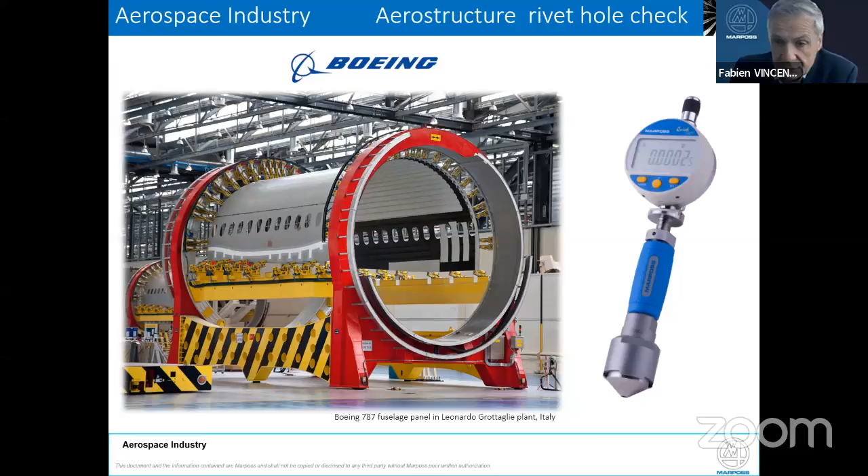So we are offering a whole range of manual gauges, but the current trend is moving toward some other solutions.

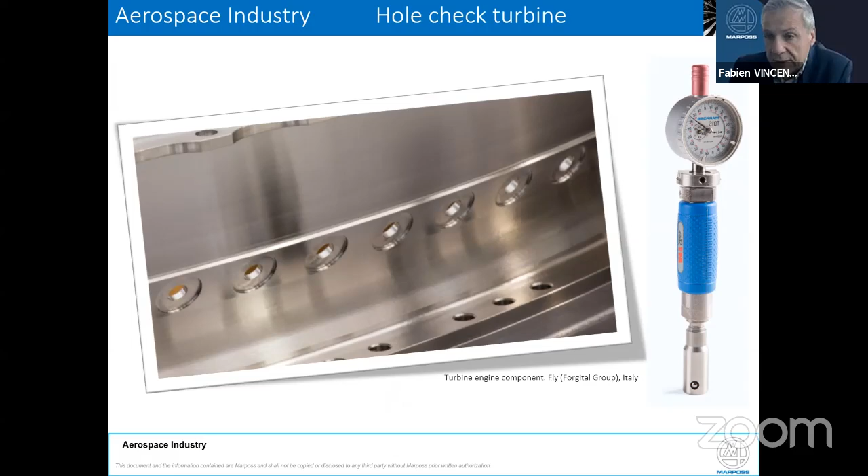The trend in this industry is to go to robotized and automated drilling processes. We can equip and offer systems that work on this automated system, drilling and controlling that the bore is properly drilled, controlling that the chamfer is properly made, and feeding back to a central unit that keeps the data of every single hole. This is what the industry is going through, so we offer also those automated checking devices.

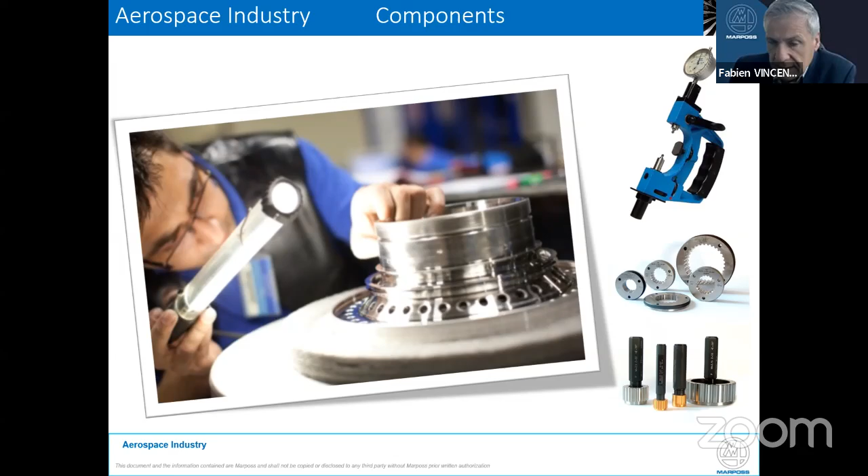And of course, a whole range of manual gauges, go/no-go gauges, thread gauges, spline gauges, for all the components which are inside the engine, and all the components which are machined for the aerostructures as well. So these are the solutions that we currently offer for customers.

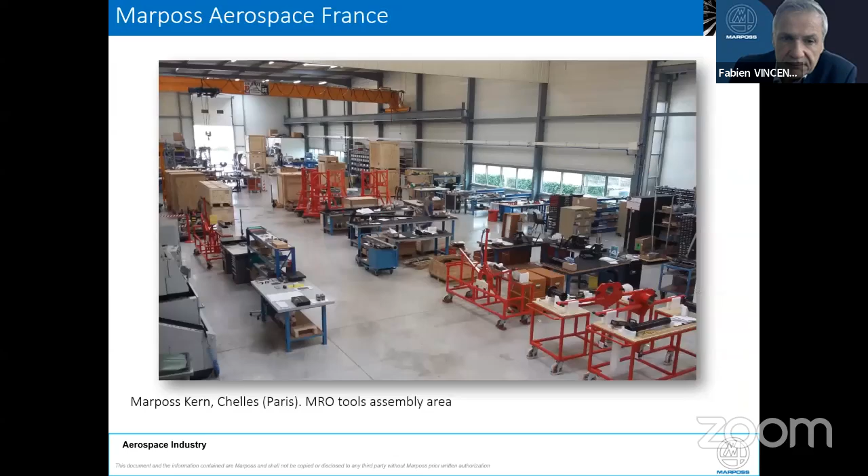I'm going to speak about one more sector, the MRO, which is another activity that we do. We manufacture toolings for the aerospace industry, designed to assemble or disassemble the elements of the engines. These are currently manufactured in France and Italy and exported worldwide. Examples include tooling designed to support grinding of turbine blades for MRO purposes - maintenance, repair and overhaul.

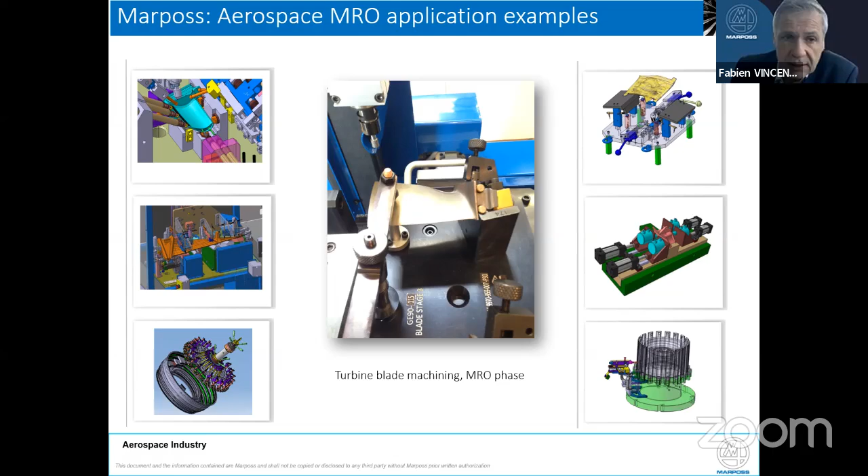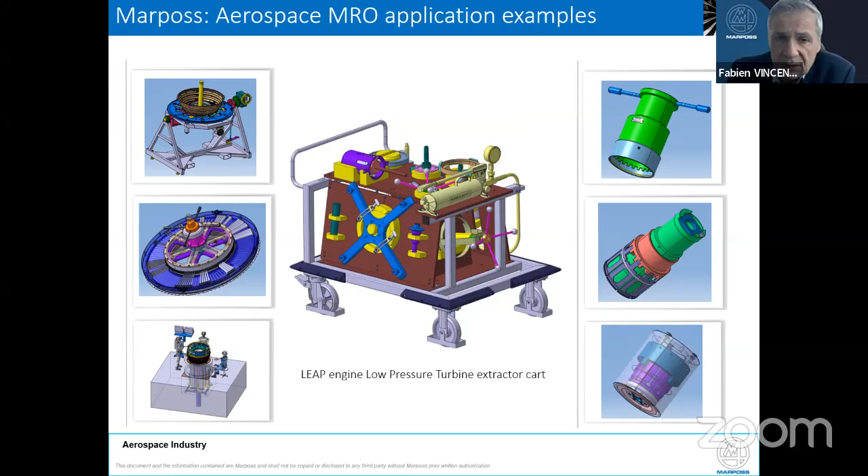We have all sorts of tools which are really dedicated, designed purposely for that purpose, and manufactured for that purpose. These are sold either through our OEMs, the engine manufacturers, or to distributors who cover the market for MRO. These are turbine extractors, keys, wrenches - all dedicated equipment that we currently manufacture for the aerospace industry.

Okay, that is what my presentation is about.

Quickly, I will take a couple of questions because I know it's a busy day for everyone.

Luca, you've spoken about quality being something you always stress. And after a lot of countries putting mandates that if somebody is exporting or bringing products, it has to be of a certain quality - according to you, what role do quality checks play for the entire manufacturing industry, especially from an Indian as well as global perspective? Your views on quality checks.